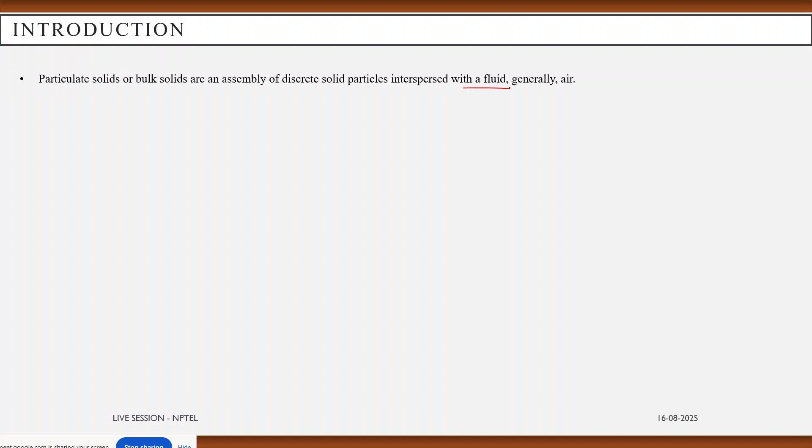Let's start with a brief introduction. Particulate solid or bulk solids are an assembly of discrete solid particles. They are interspersed within a fluid, generally air. While the interaction between the fluid and particles may have a considerable effect on the behavior of the bulk material, in the case of air as the interstitial fluid, the influence of the fluid properties becomes very negligible for grain sizes larger than a few hundred microns.

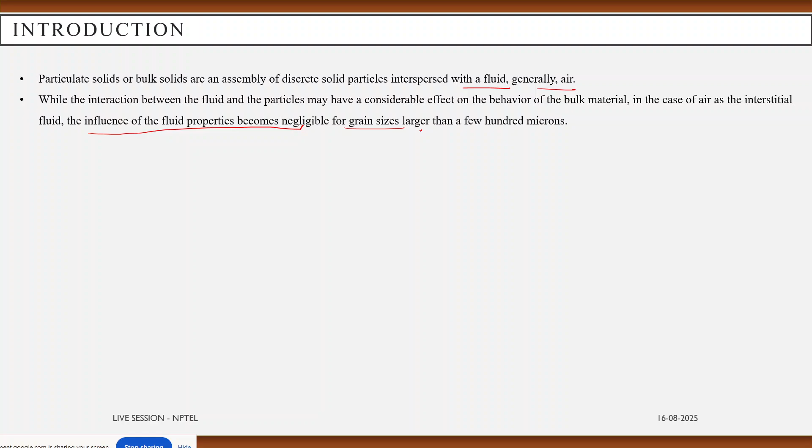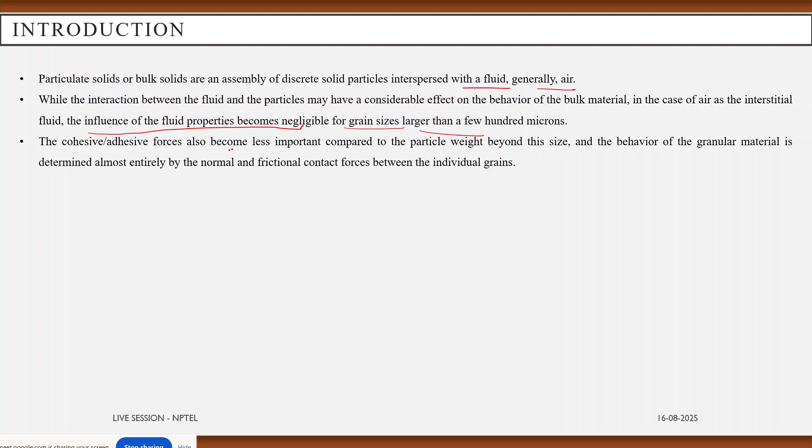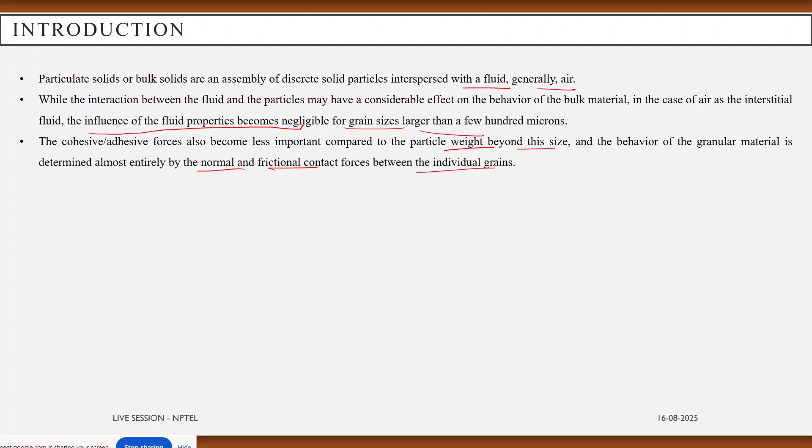So here we have to deal with some cohesive and non-cohesive particles. These cohesive and adhesive forces also become less important compared to the particle weight beyond this size, and the behavior of the granular material is determined almost entirely by the normal and frictional contact forces between individual grains. These particulate solids in the size range of 0.1 to 100 micrometers are typically referred to as powder material.

Further subdivision in terms of fine powder, superfine powder, and ultrafine powder are very common. At this scale, the cohesion or adhesion due to van der Waals forces, humidity or moisture present, and the air drag become very important and cannot be ignored.

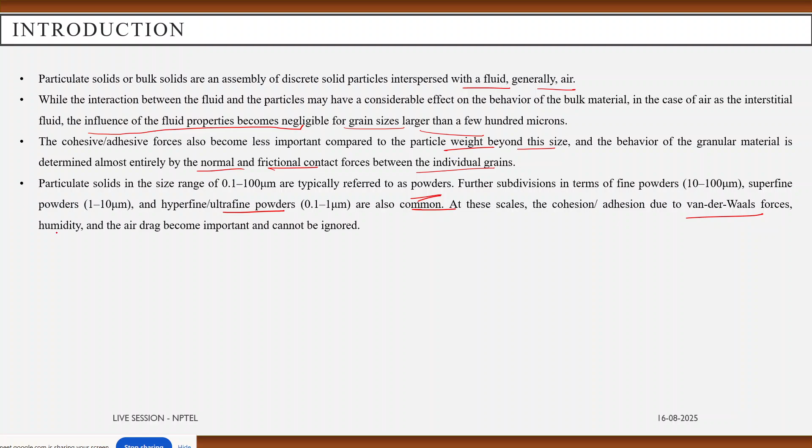In general, the properties of the solid in bulk will be a function of the properties of the individual particles, including their shape, size distribution, and the way the particles interact with each other. Thus, in addition to the size, shape, density, hardness, and surface roughness of the particles, small variations in moisture and prior loading or compaction history can lead to significant change in the bulk behavior.

Also, due to poor flowability, fine and cohesive bulk solids often show much more complex behavior, such as time consolidation or caking behavior.

Now let me focus on cohesive particles, because this kind of term we are going to use in further slides, so you have to have a proper idea or understanding about this term.

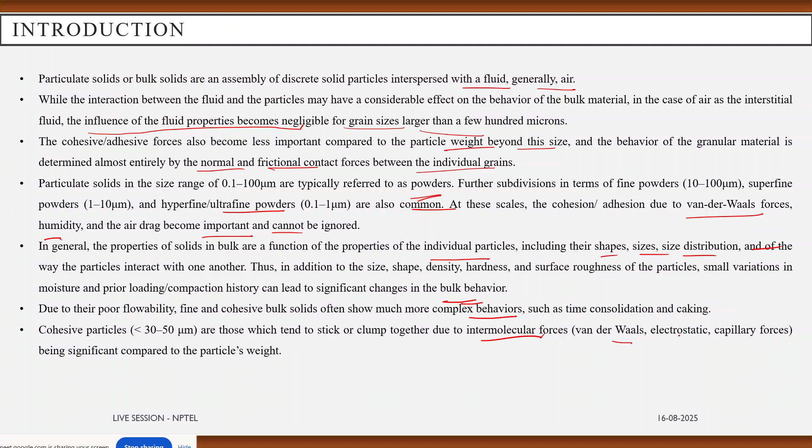Cohesive particles are those which tend to stick or clump together due to intermolecular forces, that is van der Waals, electrostatic, or capillary forces, which are very significant compared to the particle's weight. Whereas non-cohesive particles are those where interparticle forces are negligible to their weight, so they behave independently and can flow freely. So non-cohesive particles can flow freely, whereas cohesive particles tend to stick with each other due to high intermolecular forces.

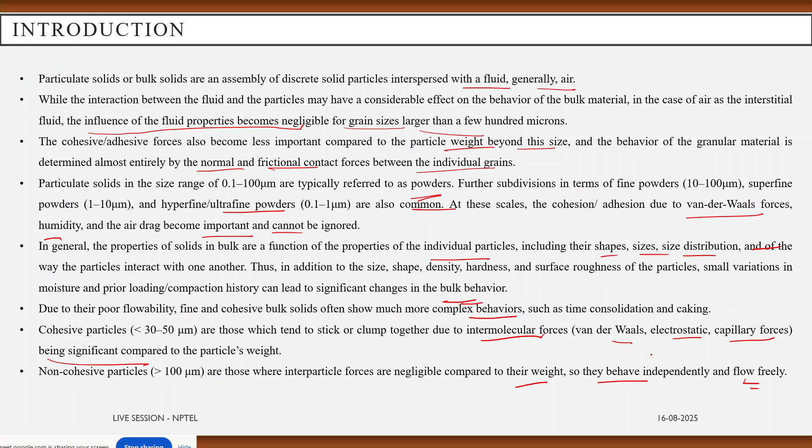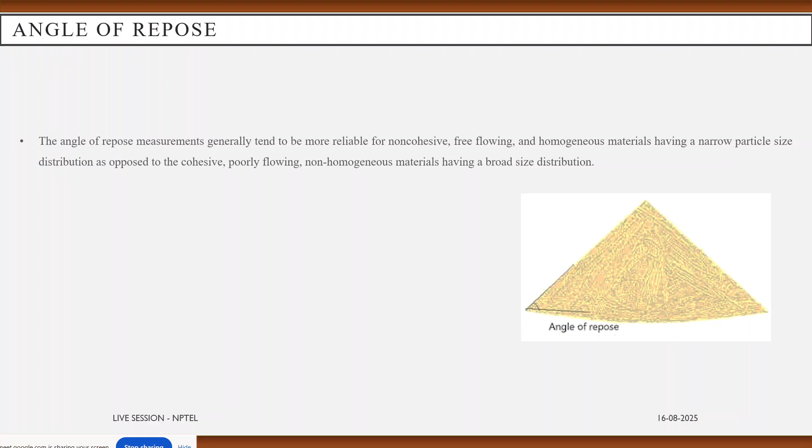It is very important to learn about the angle of repose when you are storing bulk solid material or masses. The size of the material affects the angle of repose. The angle of repose measurement generally tends to be more reliable for non-cohesive, free-flowing, and homogeneous material having a narrow particle size distribution.

Just oppositely, they behave for cohesive and poorly flowing or non-homogeneous material. Larger particles have a lower angle of repose, allowing for higher flowability as long as they have uniform shapes. For non-uniform particles, the angle of repose shows a slightly higher value, which explains the inability of the irregular shaped particles to flow.

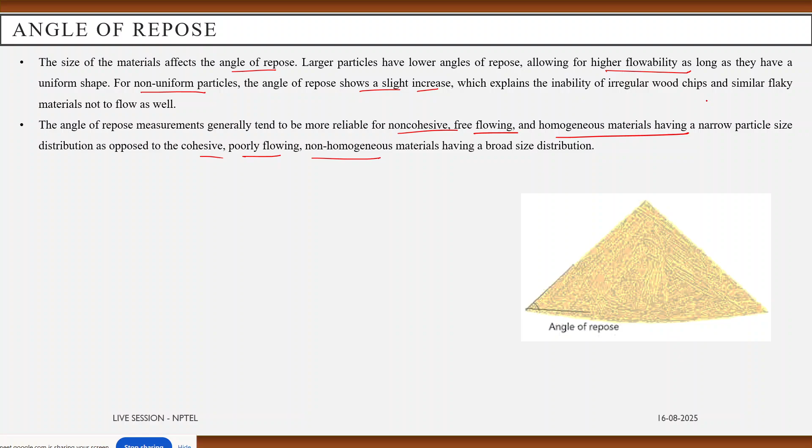One aspect of solid bulk properties is to know about their flowability. That is important because when you are storing the bulk solid into some storage bin, hopper, or silo, you also have to take out the material from there. So flowability of the material should be good, and that is related to the angle of repose.

This angle indicates how steep you can stack the material before it flows downward. It can range up to 90 degrees. A steeper angle indicates that elements pile higher before spilling and are very cohesive in nature, meaning they are very sticky, so they are very poor in flow.

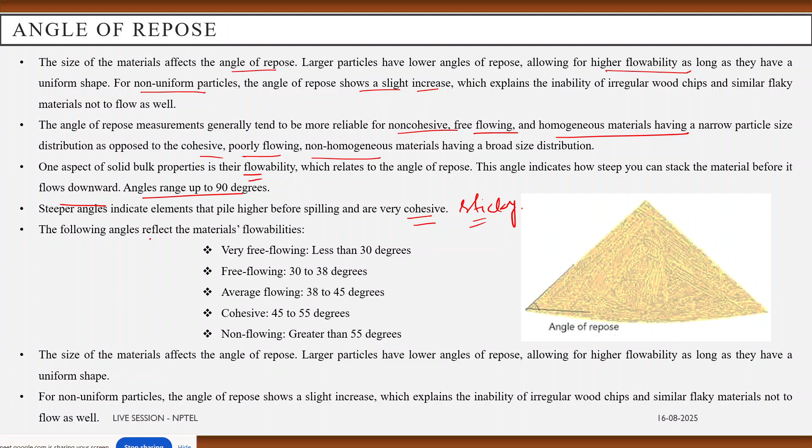Okay, so there are some measures of this angle of repose. See, this is the pile of the solid, and when it forms the angle with horizontal, this theta is the angle of repose. If theta is very less than 30 degrees, that is super free flowing material. But if it is between 30 to 38, still it is free flowing. But cohesiveness starts from 45 to 55, and greater than 55, it doesn't even flow.

So the size of the material also affects the angle of repose. The larger the material particle size, the lower the angle of repose, allowing for higher flowability, as long as they have uniform shape. For non-uniform shape, the angle of repose has a slightly increased value, which explains the inability of the material to flow.

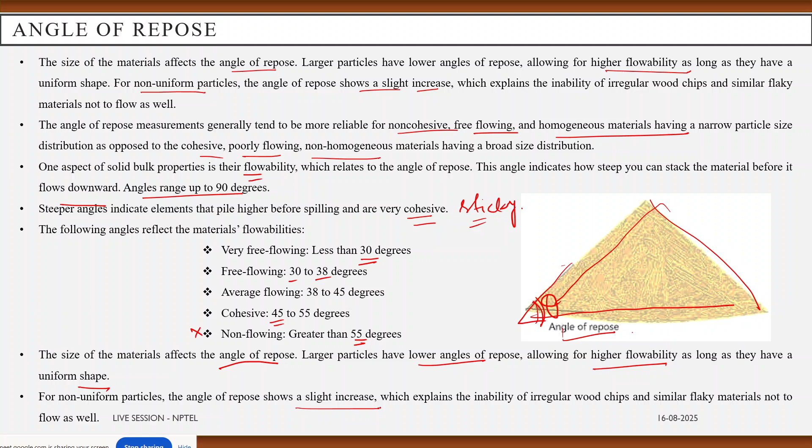Now we have to go through what pressures act inside the storage vessel or storage bin. So any kind of solid particles also exert some pressure. Suppose this is your bin and there are some solid particles. Just like liquid particles, these solid particles will also exert some pressure all around, but these pressures are not the same, unlike a liquid. Lateral pressure causes friction and this propagates to other particles due to interlocking properties. Therefore, the solid particles cannot slide over one another until an applied force reaches an appreciable magnitude.

Any kind of granular solid or solid mass permanently resists distortion when it is subjected to a moderate distorting force. When the applied force is large, failure occurs, and one layer of the particles slides over another. Pressure, as I told, is not the same in all directions in the bulk of the solid mass. The pressure applied in one direction may create some pressure in the other direction, but of a smaller magnitude. And minimum pressure is always in the direction perpendicular to the applied pressure. So that is the normal pressure.

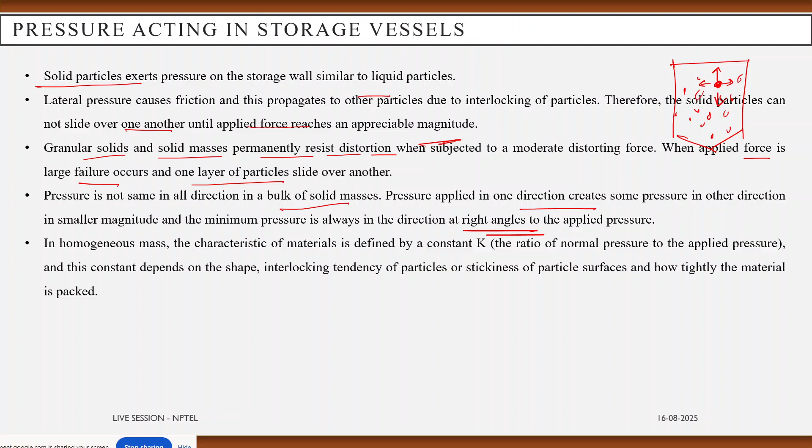So in a homogeneous mass, the characteristic of the material is defined by a constant, that is K. It is nothing but the ratio of the normal pressure to the applied pressure, and this constant depends on the particle shape, particle interlocking tendency, stickiness or cohesiveness of the particle, and how tightly the material is being packed. This constant is nearly independent of the particle size until the grain size becomes very small and the material is no longer able to flow freely.

This value K tends to 0 for cohesive particles because they are highly sticky and have high interlocking attraction. So the flowability is 0, and it can be 0.35 to 0.6 for non-cohesive particles. Shear stress applied at the surface of any solid mass of particles is transmitted through a static mass of particles unless failure occurs. Here the bulk density of the solid mass is less when the mass is packed very loosely and permits interlocking grains to move past one another. If the bulk density is very low, they can be free flowing.

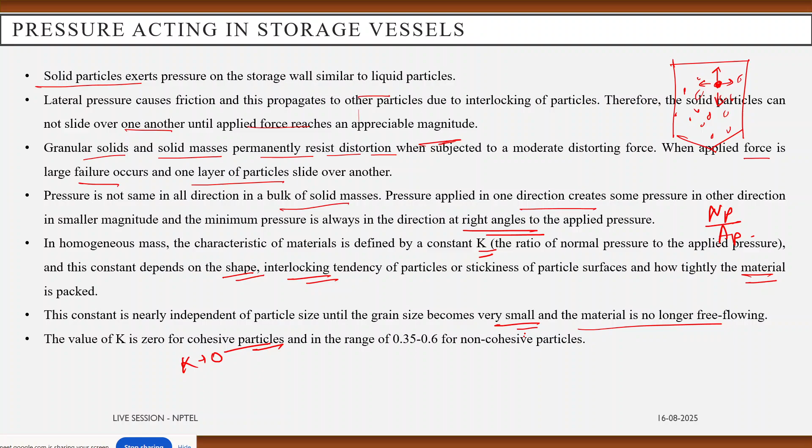So here is one interesting problem that we face during the storage of bulk solid masses, that is agglomeration. If a significant amount of the material is made of particles smaller than 10 micron, or the particles deviate substantially from isometric form, it may be inferred that the flow characteristics will be very poor. And if the particles tend to agglomerate, poor flow properties might be expected.

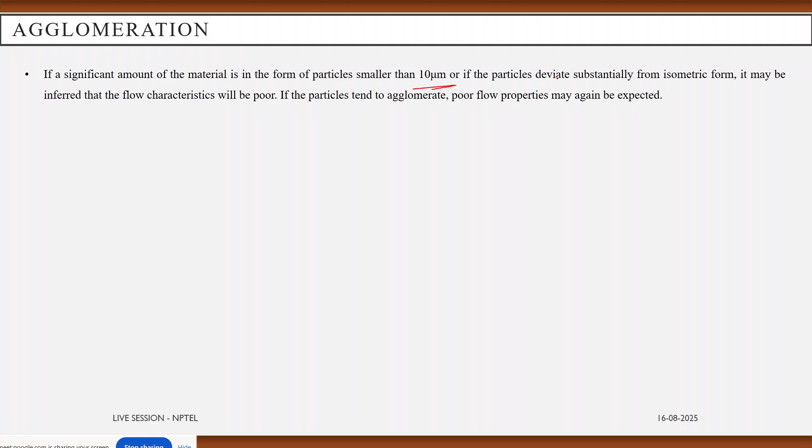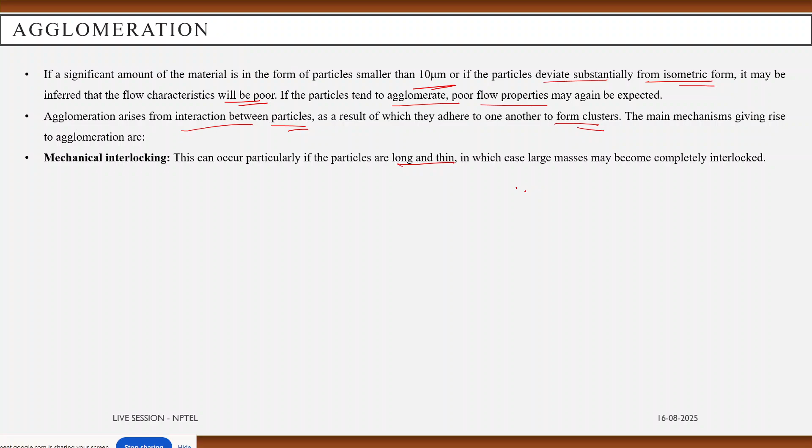So this agglomeration arises from interaction between the particles, and as a result they adhere to one another to form big clusters. The main mechanism that enhances the agglomeration is mechanical interlocking. This can occur particularly if the particles are long and thin, in which case large masses may become completely interlocked. Surface attraction: there are surface forces, including van der Waals forces, that may cause substantial bonds between particles, particularly where the particles are very fine, with the result that their surface per unit volume is very high and there will be high surface attraction.

In general, freshly formed surfaces, such as those resulting from particle fracture, will give rise to high surface forces. Plastic welding occurs when irregular particles are in contact, the forces between the particles act over extremely small surfaces and very high pressure is developed, which may give rise to plastic welding. Electrostatic attraction: particles may become charged as they are fed into equipment, so significant electrostatic charge may build up, particularly in fine solids.

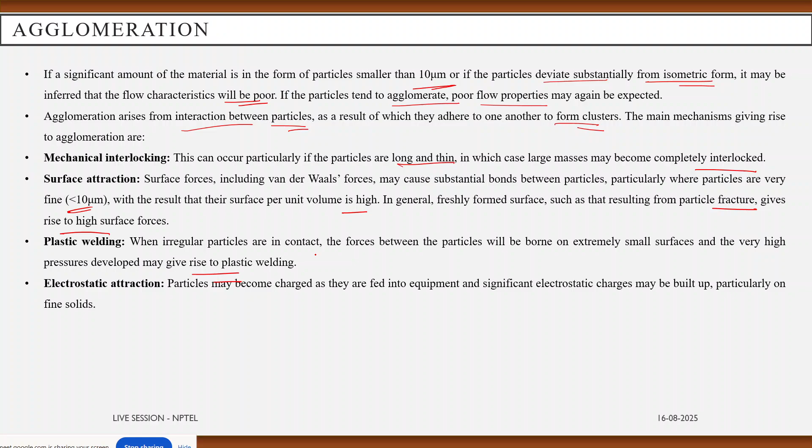The effect of moisture, as I already told, is that the particles become too sticky to each other, and there will be an increase in the surface tension between the particles. Also, it may dissolve a little bit of solid, which acts as a bonding agent on subsequent evaporation. Temperature fluctuation also brings some changes in the particle structure and greater cohesiveness. So these might be the cases due to which agglomeration occurs and the solid particles may behave very poorly in flow.

Now we also had to understand what the hazardous conditions are when we are dealing with bulk solid masses.

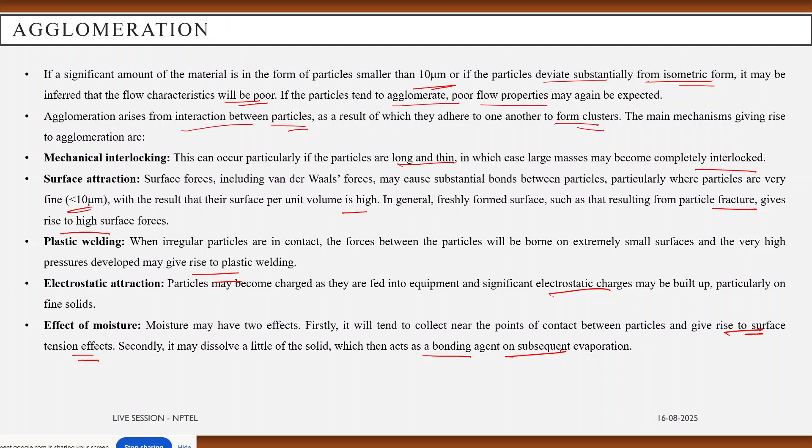So the first is segregation. Although fluid mixtures tend to remain homogeneous, mixtures of solids are prone to segregate due to differences in particle size, shape or density, as we know. For example, sifting segregation occurs when the smaller particles move through a mixture of the larger particles, causing fines to accumulate in the center of the storage vessel. So these are the very small particles, and the coarser materials roll down to the wall or the periphery.

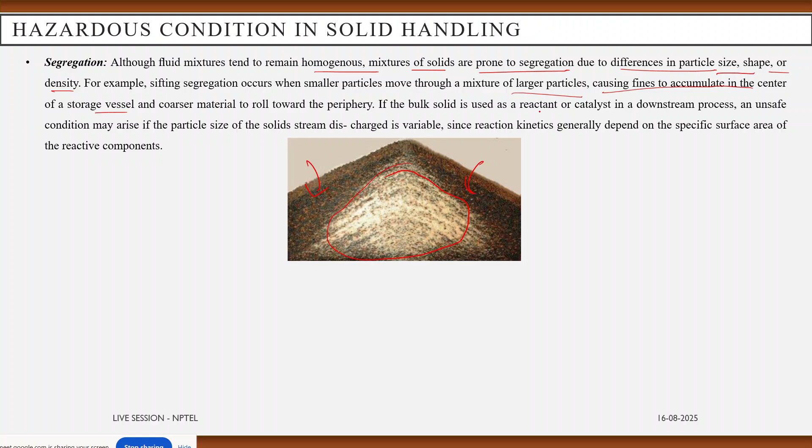If the bulk solid is used as a reactant or catalyst in the downstream process, it will be a very unsafe practice if the particle size distribution gets disturbed in such storage. Obviously, that depends on the reaction kinetics, and surface area and other things will change. So we need to ensure how the materials are being stored, because if segregation is happening inside the vessel, we need to mix it again.

Dusting. If a sufficient amount of material becomes dispersed in the air, a serious fire or explosion can happen. If an ignition source is present and an oxidant is also present, obviously there will be a chance of explosion once the minimum explosible concentration is exceeded. If it is above that, then combustion will take place rapidly and there will be a flash fire.

Next is flooding. The discharge rate from a storage vessel is typically controlled by a feeder. It can be a screw feeder or a belt feeder. When entrained in air, a fine powder can sometimes behave like a fluid, and since the feeder is designed to handle solid materials rather than fluids, discharge becomes very uncontrollable and can be choked, or the hopper can completely become empty. So obviously these safety problems occur when we don't deal with solid materials with proper knowledge.

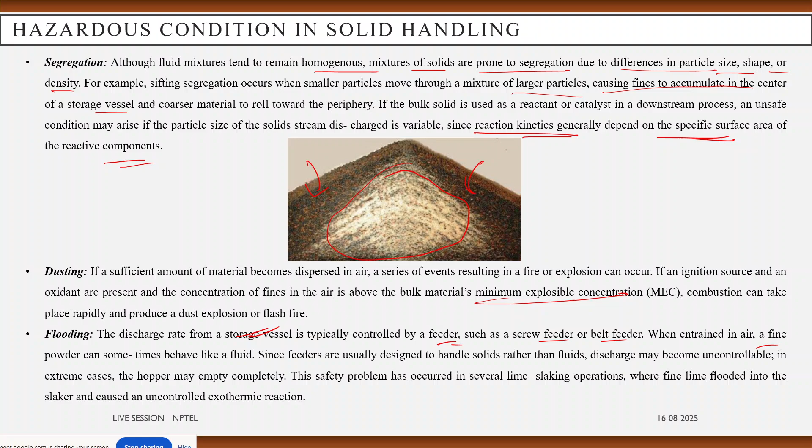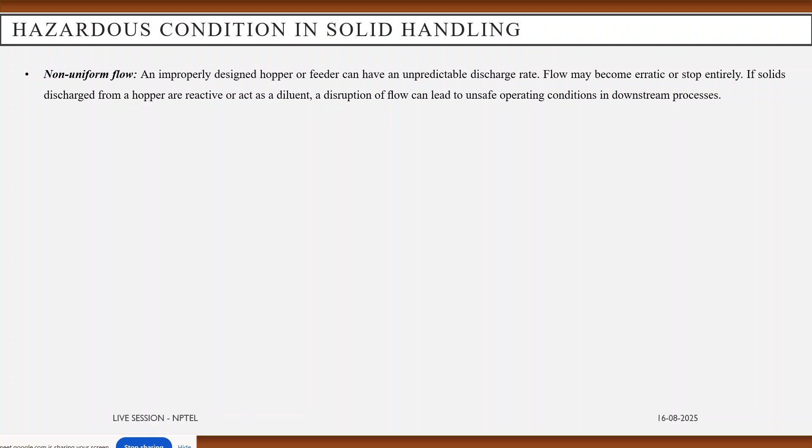Another hazard that may follow is non-uniform flow. An improperly designed hopper or feeder can have an unpredictable discharge rate. Flow may become erratic or stop entirely. If solids discharged from a hopper are reactive or act as a diluent, they may hamper downstream processes a lot. Now, charge accumulation: when insulating materials such as plastics are handled in silos, bins, or hoppers, they cause problems such as blend non-uniformity and unwanted agglomeration.

So here we can see material adhesion to the surfaces of process equipment, and in extreme cases a fire or explosion can also happen. The severity of the hazard associated with bulk solid handling depends on the flow patterns inside the hopper, silo or bin. So learning about flow pattern or flowability is very important to avoid hazardous conditions. For example, when two materials come in contact, electrons may become separated from atoms on the surface

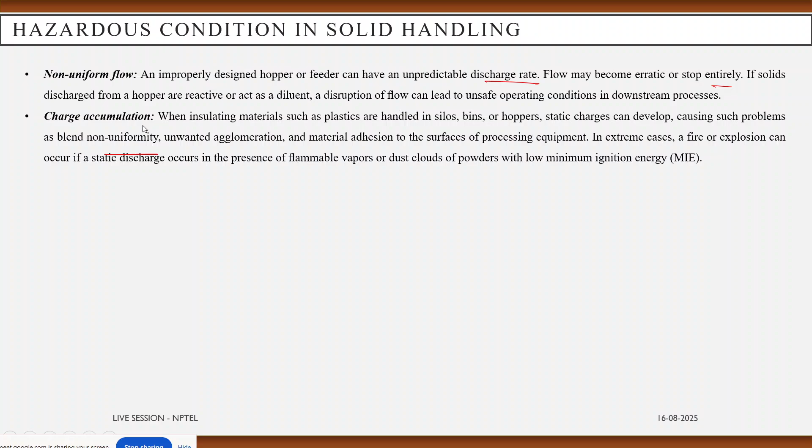of one material and may be transferred to the atoms on the other. So they create a positive charge on the electron donor and a negative charge on the electron acceptor. This kind of mismatch can happen when there is no proper handling of the bulk solid. If the material is insulating, it will remain charged when the materials are separated. Even if the substance is an electrical conductor, it may remain charged if it remains isolated from the ground.

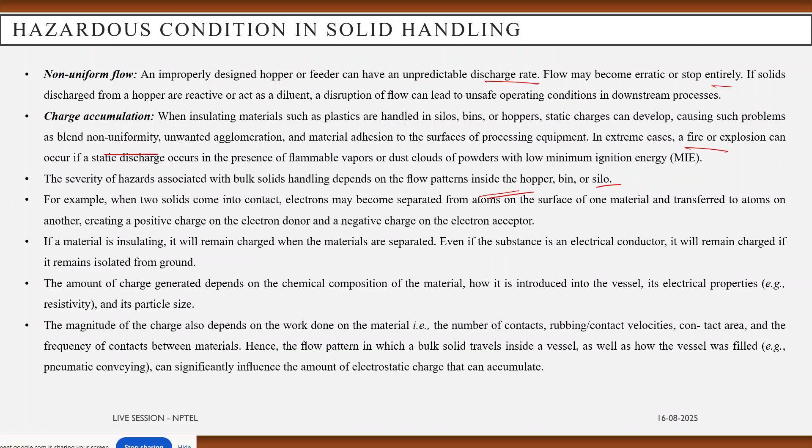The amount of charge generated depends on the chemical composition of the material, how it is introduced into the vessel, its electrical properties and the particle size. The magnitude of the charge also depends on the work done on the material. Hence, the flow pattern in which the bulk solid travels inside the vessel is very important to understand. Now we will discuss the storage of bulk solids.

So hopper and bin frequently refer to smaller and wide storage vessels for bulk solids, whereas silo refers to very tall vessels in which several tons of material can be stored. They are basically cylindrical or rectangular shapes made of concrete or metal. A hopper is a small vessel with a sloping bottom. These sloped bottoms are used for very temporary storage before feeding to the process equipment.

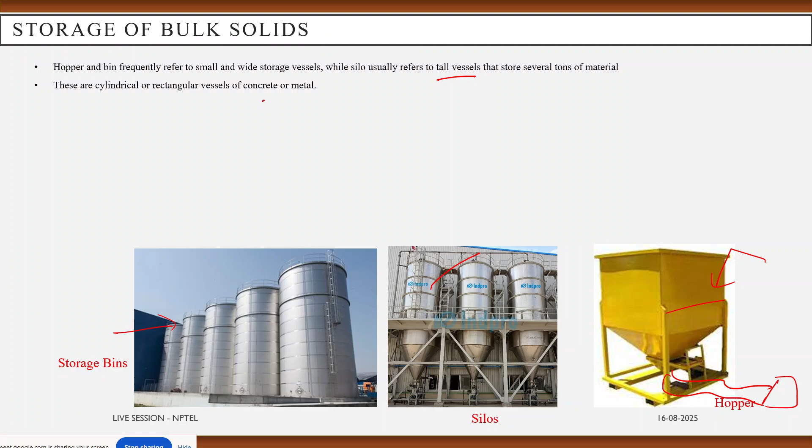So there is always friction present between the wall and the solid grains. Frictional force at the wall tends to offset the weight of the solid and reduce the pressure exerted by the mass on the floor of the container. Vertical pressure on the vessel floor or the packing support is much smaller than that exerted by a column of liquid of the same density and height.

Actual pressure from the solid depends on the value of the material characteristic constant for a specific solid and the frictional coefficient between the solids and the container wall. Also, it depends on the way the solid is placed inside the vessel. If the height of the solid column is greater than 3 times the diameter of the container, any additional solids have no impact on the pressure at the base inside the vessel. However, the total mass will increase, and more solids can be added.

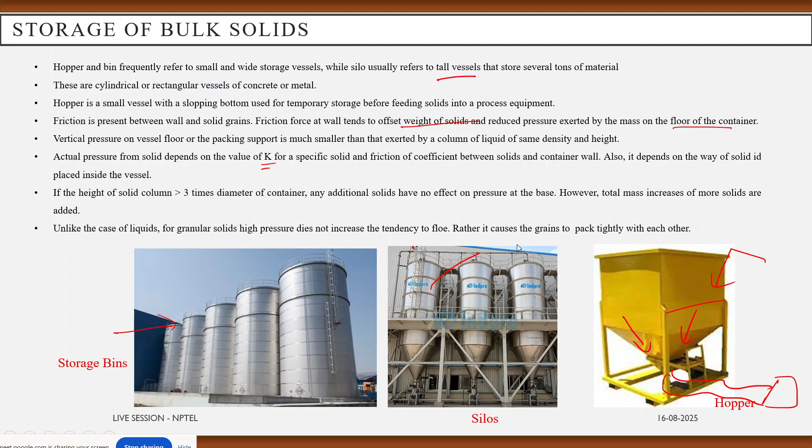Unlike the case of the liquid, for granular solids, higher pressure does not increase the tendency to flow. Rather, it causes more grains to pack tightly and they may cause poor flowability. So we can now discuss the flow patterns in different storage vessels. First one we will discuss is mass flow.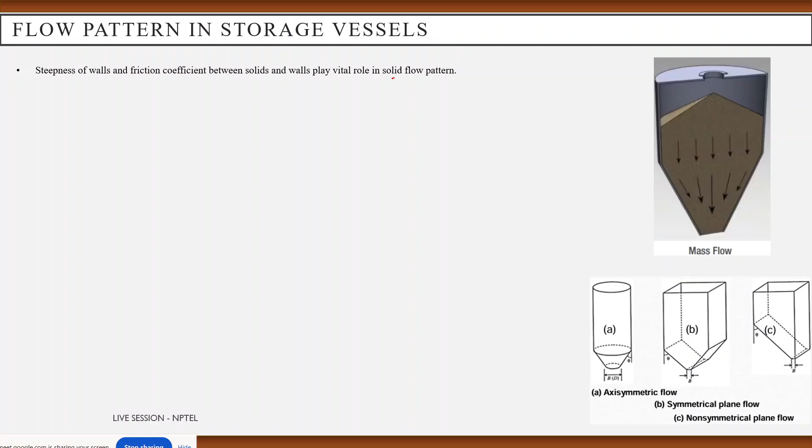In mass flow, the entire bed of the solid is always in motion when the material is about to discharge from the outlet. This behavior prevents the formation of any kind of stagnant material inside the vessel and any formation of rat holes. It affords a first in first out flow sequence and ensures a more uniform velocity profile during the operation. Material surface in the cylinder descends uniformly and flat. No stagnant zone is found.

Shear occurs along the wall and residence time distribution is also very narrow. Segregation is also minimized here. In order to achieve mass flow condition, two conditions must be met: the sloping of the hopper walls must be steep enough and have low enough friction for the particles to slide along them, and the outlet must be large enough to prevent any kind of arching situation.

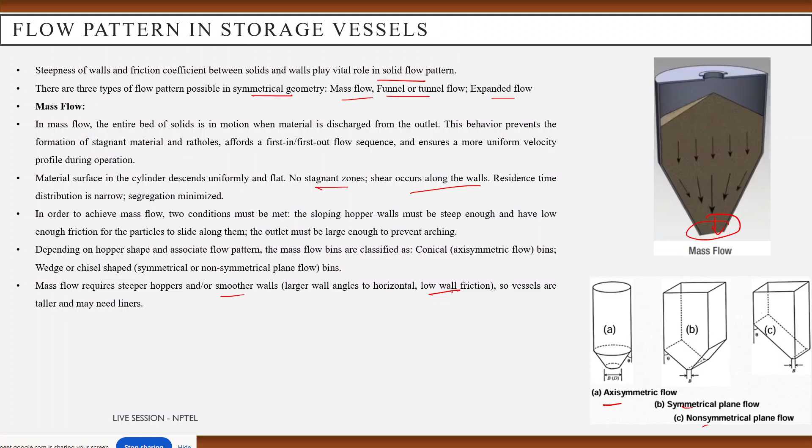Depending on the hopper shape and associated flow pattern, the mass flow bins are classified into conical or axisymmetrical, wedge or chisel shaped, that is symmetrical and non-symmetrical plane flow patterns. So mass flow requires steeper hoppers, as I already discussed, and obviously smoother walls, so that they provide low wall friction, and larger wall angles to the horizontal, that is steeper. So vessels should be taller and should have liners.

Structural stress on the walls during discharge is more uniform but often higher in lateral stress than in funnel flow. So a mass flow hopper has a first in first out flow sequence that minimizes the segregation effect. That is already discussed, right? What is the segregation effect? Because the entire bed of the material is in motion, the velocity of the solid in a vessel designed for mass flow is much lower than in a funnel flow hopper. Therefore, it typically reduces the amount of static charge generation.

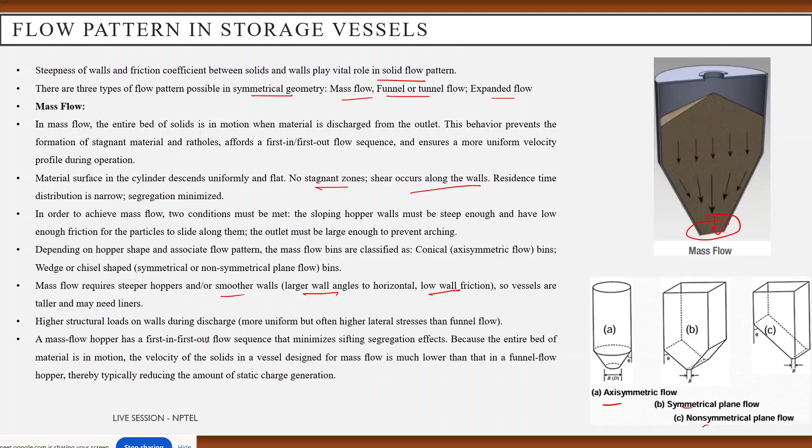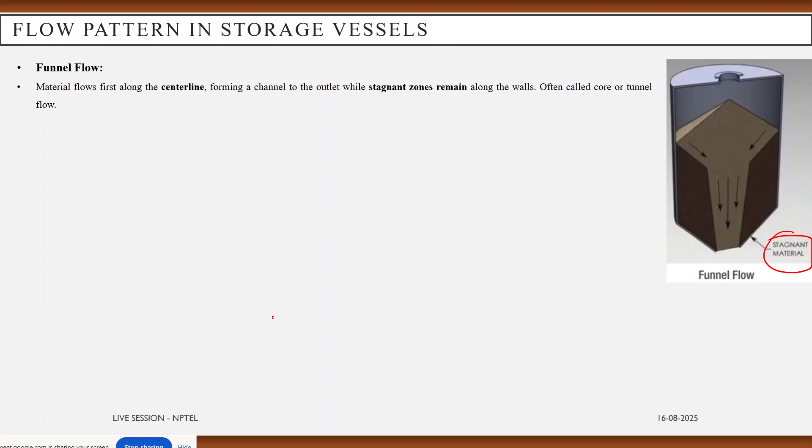Now we will discuss the funnel flow. Here the main problem is stagnant material formation. The material flows first from the central line, forming a channel to the outlet, while a stagnant zone remains along the walls. Often this is called core or tunnel flow. In funnel flow, only a portion of the bulk solid above the outlet is in motion, while some of the material remains stagnant at the periphery as the material is discharged.

Funnel flow occurs when the sloping hopper walls are not steep enough and low enough in friction for the particles to move along them. Under these conditions, the particles slide on each other rather than on the hopper wall. An internal flow channel develops.

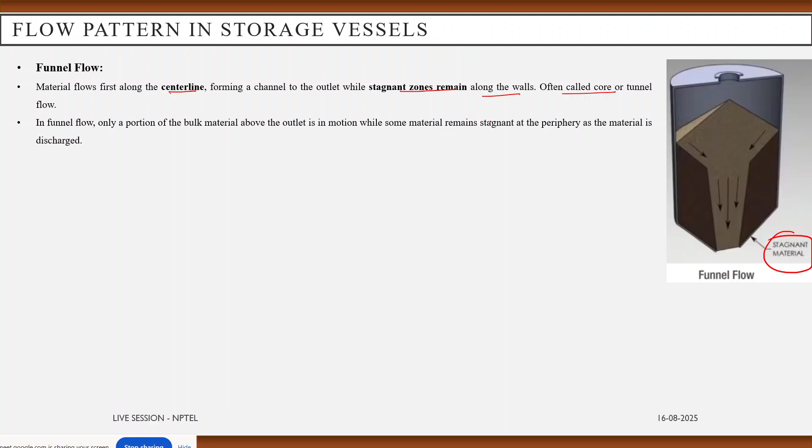Funnel flow can cause erratic flow and exacerbate segregation, reduce the usable capacity of the vessel, and allow particle degradation, because they can form caking or spoilage of the particle can occur. And depending on the vessel size, they can induce high load on the structure and the downstream equipment due to collapsing of rat holes and eccentric flow channels. So here the fine powders will flood if the rat holes collapse and if fresh material is added to the vessel.

Velocity of the solid in the flow channel of a funnel flow vessel can be very rapid, especially in the conical hoppers with a flow channel diameter which is slightly larger than the outlet diameter of the storage bin. Compared to the mass flow bins, the number of contacts and the frequency of contacts between the individual particles are very high in case of the funnel flow. So the potential for static charge accumulation is also higher.

Furthermore, when the bulk solid is insulating, the stagnant material along the periphery of the vessel will limit the effectiveness of bonding the charge of the vessel wall. If a rat hole collapses, the solids can become entrained in air inside the empty channel, creating an atmosphere conducive to a dust explosion as well. Funnel flow occurs when the hopper angle is not steep enough or the wall friction is too high to mobilize the material particles along the wall, and in large diameter bins with smaller outlets. So these are the causes for funnel flow.

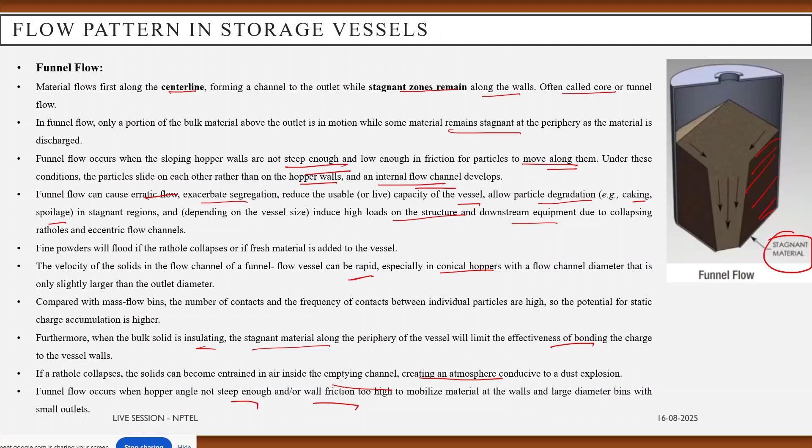Now we talked about arching and rat holing. These are the kinds of obstruction that we face when we want to discharge materials from the storage bin. So this is the case where no obstruction is found. This is a smooth operation. But arching occurs when there is a stable obstruction for the solids formed directly above the outlet and it blocks the discharge. It happens when the outlet size is too small for the material's flow property, more common with cohesive particles or stickiness, and there will be interlocking between the coarser particles.

Rat holing situation is very common for funnel flow bins. If the material is cohesive and very poorly aerated, the stagnant zone doesn't even move. Once the core empties, flow stops even though there is much more material present in the silo. So these are some problems; we need to design the silos or the storage vessel in such a way that this kind of obstacle can be avoided.

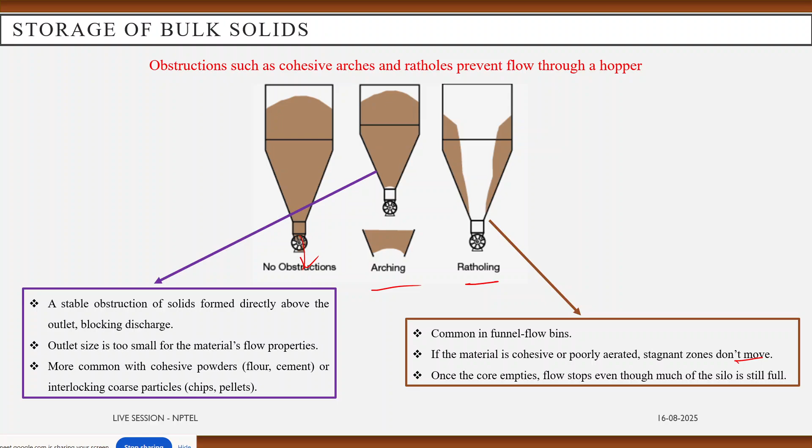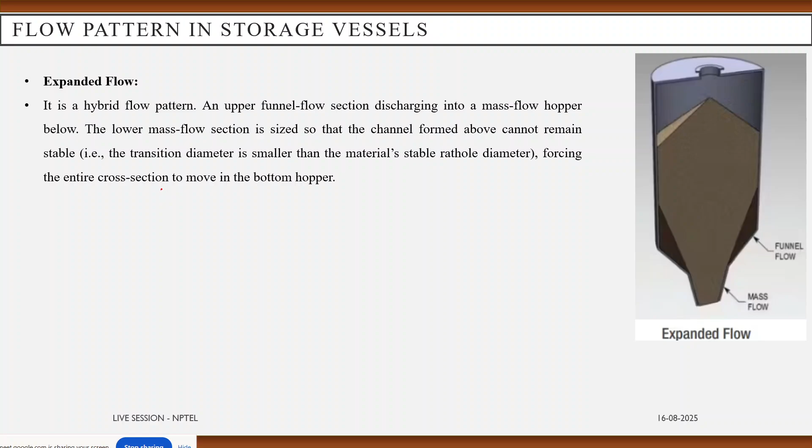The next part is expanded flow, which is another flow pattern found in the storage vessel. This is nothing but a hybrid flow pattern where we can get funnel flow as well as mass flow in the same hopper. The lower mass flow section is sized so that the channel formed above cannot remain stable, forcing the entire cross section to move into the bottom hopper. An expanded flow design requires an upper funnel flow section. So this one is the funnel flow section and this one is the mass flow section, on a first in first out basis. It is an efficient flow pattern we can get in expanded flow silos. They are recommended for storing large quantities of non-degrading materials and for modifying existing funnel flow silos to correct problems caused by arching, rat holing or flushing.

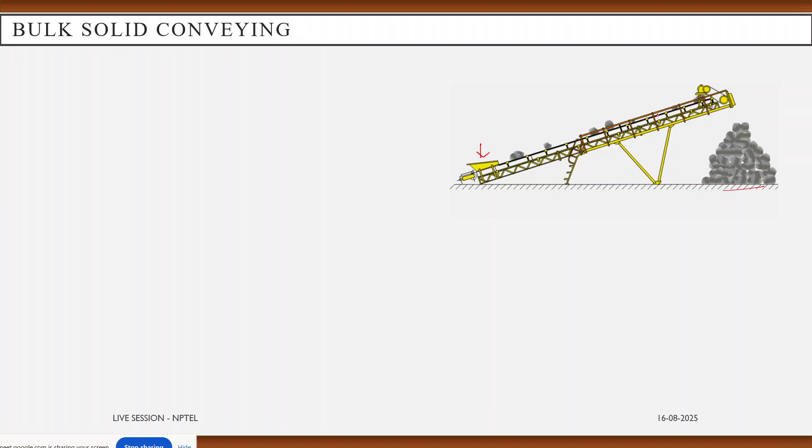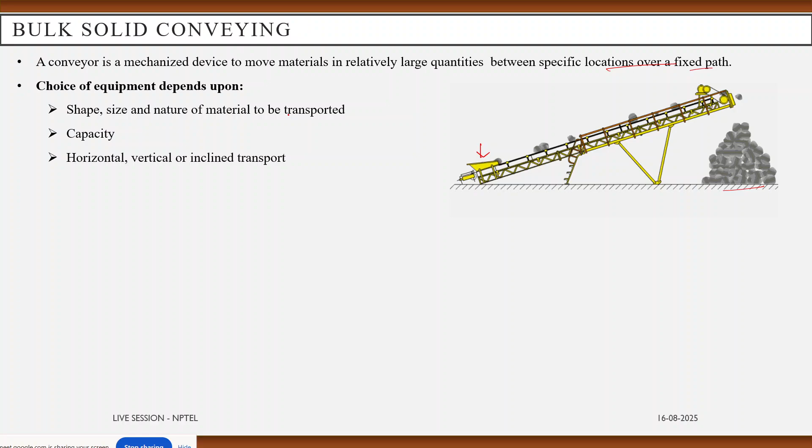So let's start. A conveyor is a mechanized device to move materials in relatively large quantities between a specific location over a fixed path. Choice of the equipment depends on the shape and size and nature of the material to be transported, also the capacity that we want to transport, also the arrangement, whether horizontal, vertical or inclined transport is possible, and also the distance of travel. For long distance solid transport, we generally prefer rail, road or ship medium. For any kind of short distance solid transport, we use conveyors. They either can carry the solid or drag the solid through channels. Sometimes conveyors are found to be more economical than the road or rail medium.

So we also have vertical conveyors, that are also known as elevators. Conveyors can be classified in different ways. It can be classified by the type of product being handled, unit load or bulk load; location of the conveyor, in floor, on floor or overhead; and whether loads can be accumulated on the conveyor or no accumulation is possible. So here, mechanical conveyors are belt, chain, bucket, screw and apron conveyors.

So mechanical conveyors are typically for 10 to 20 kilometer distance transportation. Pneumatic conveyor is like a pipe conveyor for 600 to 100 kilometer distance transportation. So here we can start with the belt conveyor.

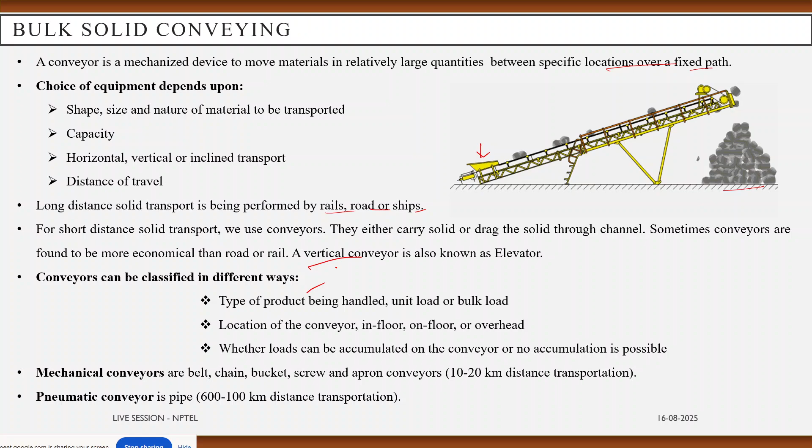Belt conveyor consists of an endless flat and flexible belt which has sufficient strength and is made of fabric, rubber or plastic, leather or metal, which is laid over two metallic flat pulleys at two ends. This is the belt, and they are driven by one of the two end pulleys.

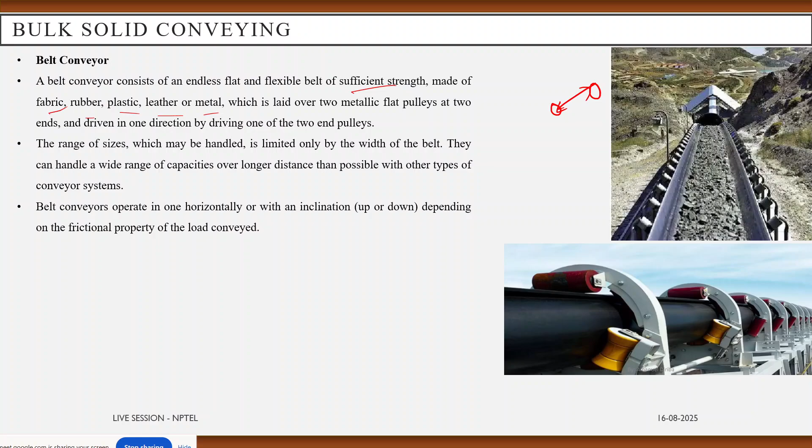So the range of sizes which may be handled is limited only by the width of the belt. They can handle a wide range of capacities over longer distances than is possible with other types of conveyor systems. Belt conveyors operate either horizontally or with inclination depending on the frictional property of the material. For changing the direction of the material being conveyed in the horizontal plane, more than one conveyor belt will be required. Conveying capacity of a conveyor can be controlled by changing the belt speed.

Metal or a special belt can be used to carry hot, abrasive and some reactive material. Advantages are we need less manpower, it is more economical, has low power consumption, and there will be low maintenance cost as well. And multi-point loading is convenient. Unloading and loading also follow a simple arrangement.

But the disadvantage is we cannot do vertical transportation by this simple belt conveyor, and also it is not suitable to use an open belt conveyor for dust particles or very fine particles. So generally we prefer a closed chamber belt conveyor system.

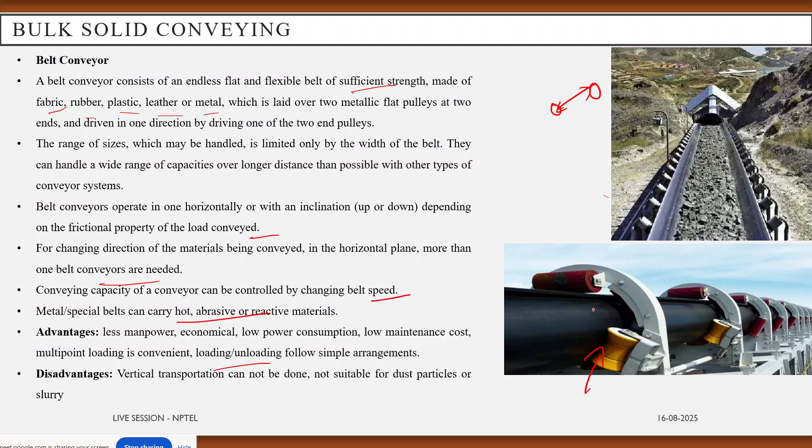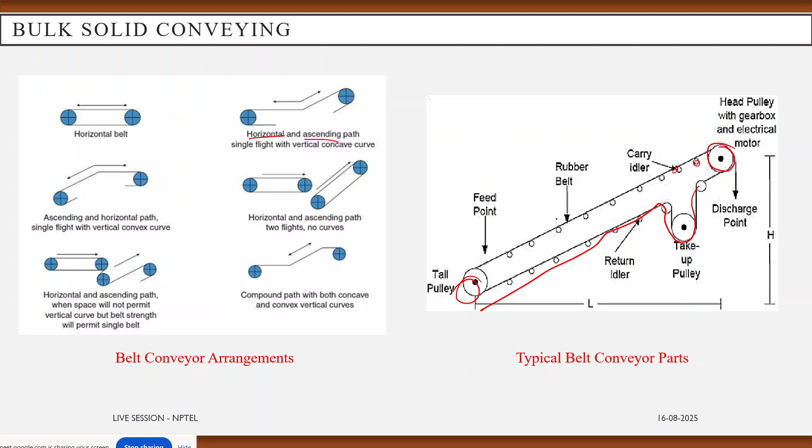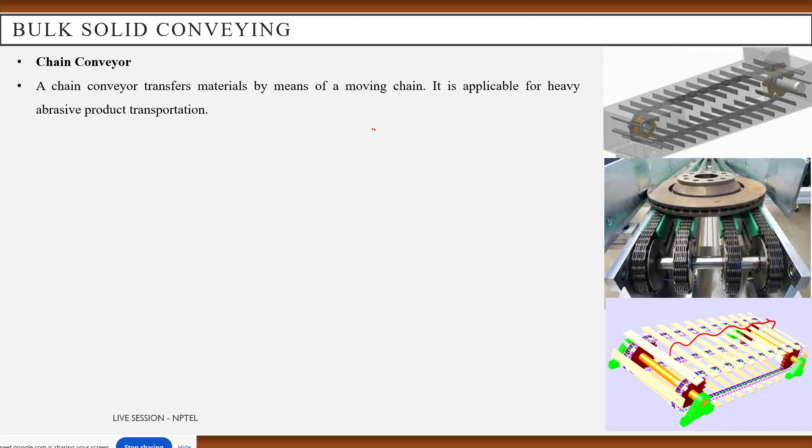Next one is the chain conveyor. You can see these are the chains that are rotating and thus the material is being carried over. So a chain conveyor transfers material by means of a moving chain. It is applicable for heavy and abrasive product transportation. A conveyor chain has plates, blocks and bars attached to it, which are designed to fasten, push and drag the object in its own way. It can generally be easily installed with minimum maintenance.

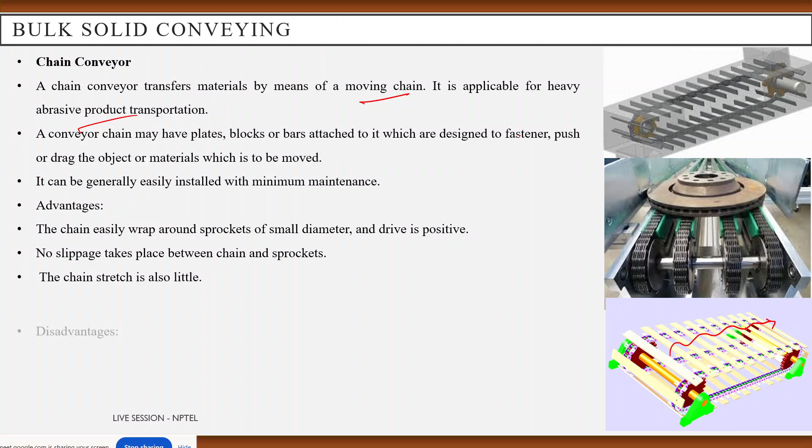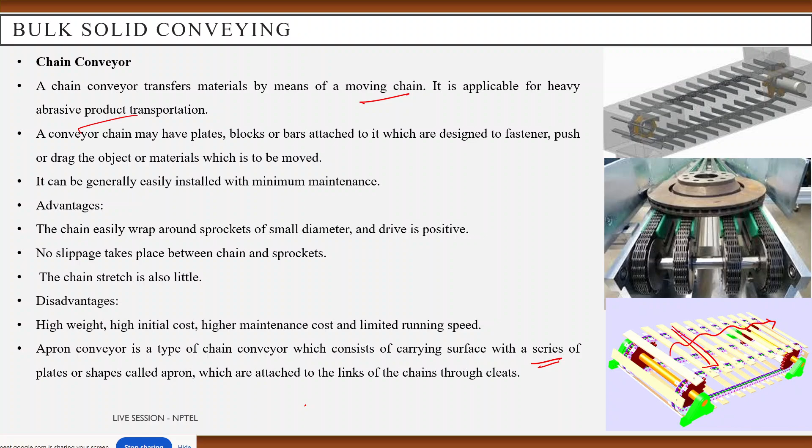Advantages are that the chain easily wraps around sprockets with a small diameter and the drive is positive. No slippage takes place between the chain and the sprockets, and the chain stretch is also little. Disadvantages are high weight, high initial cost, and higher maintenance cost. Also running speed is limited. Apron conveyor is a type of chain conveyor which consists of a carrying surface that is a series of plates, which is called the apron. It is attached to the links of the chain through cleats.

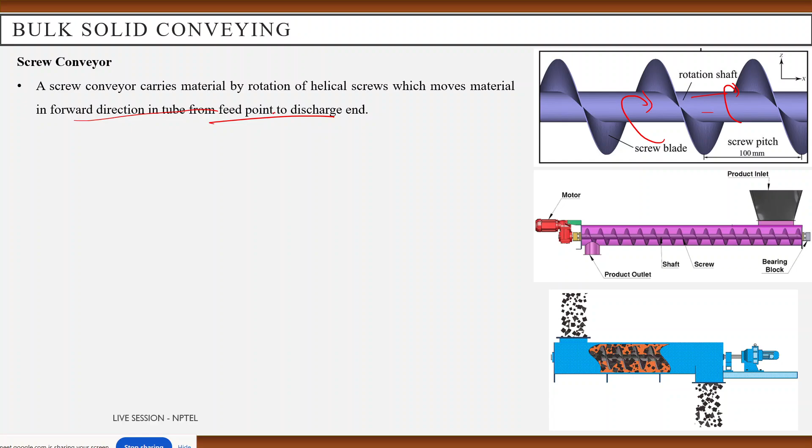Next one is the screw conveyor. In a screw conveyor, these are the screw blades and this is the rotational shaft. It will rotate, so the material moves forward in the tube from the feed point to the discharge, while the helical screw rotates. The forces that keep the material from rotating with the screw blades are the material's own weight and the frictional resistance. Using the screw conveyor, fine and pasty solids and abrasive as well as non-abrasive material can be conveyed.

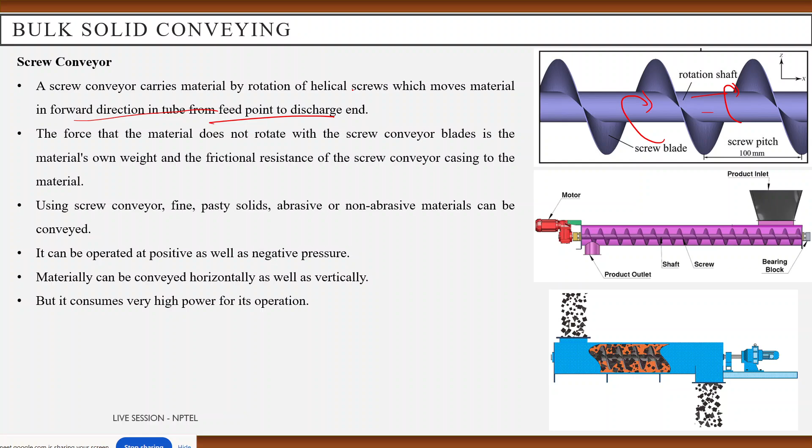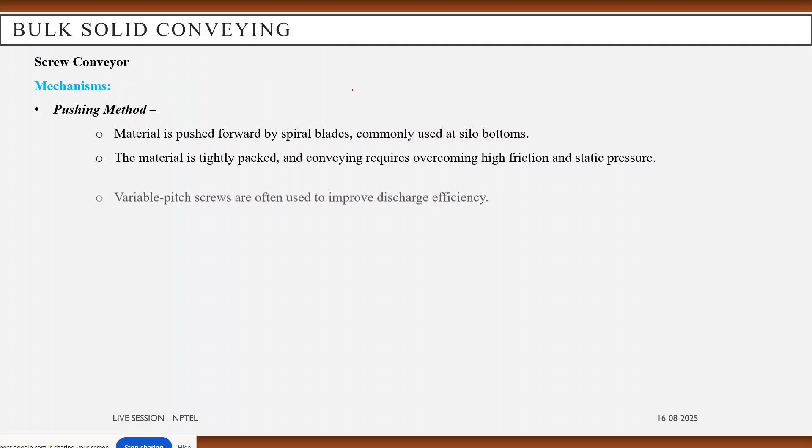It can be operated at positive as well as negative pressure, and it can also be operated horizontally or vertically. But it consumes very high power for its operation. And here are the mechanisms. The pushing method: spiral blades push the material forward, commonly used at the bottom of silos. Tightly packed material conveying requires very high friction and static pressure. Variable pitch screws are often used to improve the discharge efficiency.